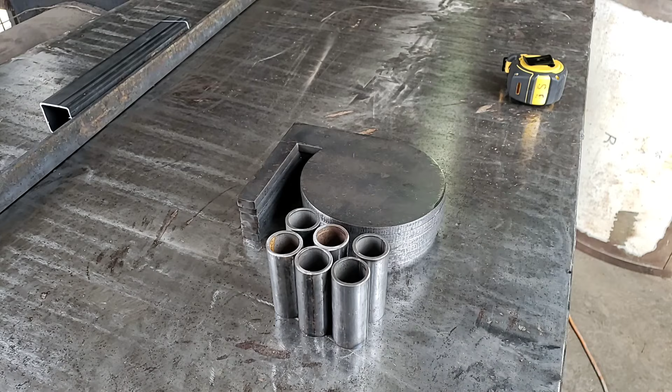We are in my shop and I've been wanting to build one of these dueling trees for quite a while, so I ordered this kit off of Amazon. I think this came from Magnum Targets, who I bought it from—no affiliation with them. In fact, most of my steel, probably all of it, is from Shooting Targets 7, but they don't sell a dueling tree kit, so I went on Amazon and found this one. This is 3/8 inch AR500 steel, 6-inch paddles, and it came with these little tubes that get welded to your own steel so you can build a dueling tree.

It comes with 6 paddles. I think these are Magnum rated. Primarily I'll be shooting this with 9mm, so it's probably a little overkill, but you never know—you might want to shoot something with a rifle from time to time at distance.

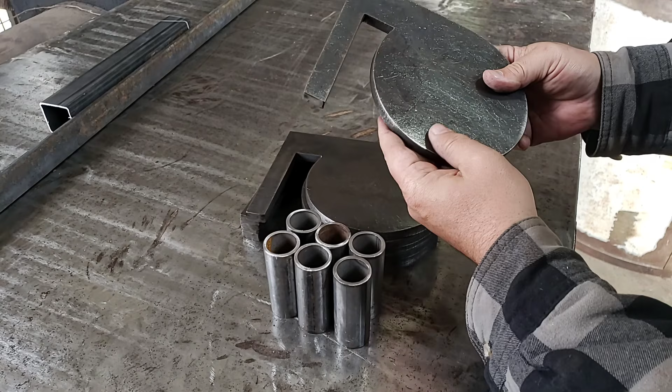So this is the kit that I got. These were pretty nice—I don't know if this is laser cut or water jet. I'd hope these were water jetted so it doesn't lose any tempering, but I just don't know. The kit was pretty inexpensive.

They did a nice job of grinding out these little paddles here, so I think they'll roll just fine inside the tubes since they're ground down nicely. Overall, you can't hardly mess up something that's water jetted or plasma cut, however it's done, but they're pretty nice. Looks like there's some attention to detail—it's all deburred, nice little paddles.

So this is what came in the kit: those 6 paddles, 6 of the little tubes. You got to supply your own steel. I've got a piece of 1.5 inch angle, 1/4 inch thick, in a 72-inch length. What I'm going to do is use this piece of steel to slide that into—maybe I can show you here.

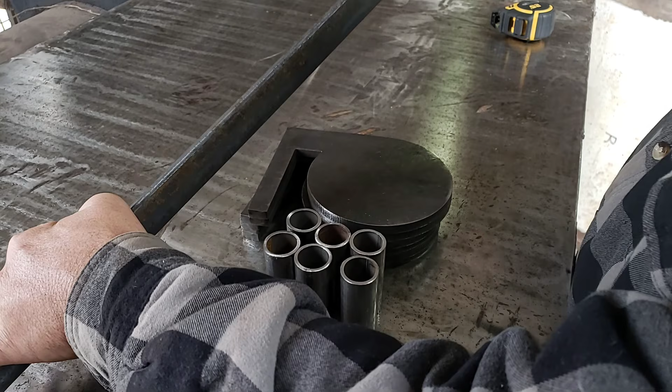What will happen is at the base, this will just slide into the base like so, and that's what's going to hold it up.

So that's the plan for today. We got to get a base put together, we got to weld this up. I'm also thinking about a way I can design this where it can be used for both a dueling tree and a plate rack. I don't know, maybe I'll sit down and draw some stuff out and see what we're planning to do here. Give me 1 second, I'll show you what the base looks like.

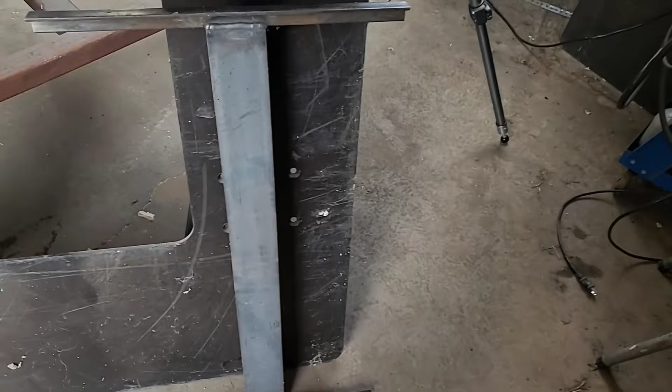Okay guys, so as far as the base, I got a couple options here. I've got this piece of steel that was in my scrap bin. We could use that, and that would probably be strong enough. I would just need to grind those little tabs off that are on there—I don't know what this was used for before—and lengthen these little arms just a bit, paint it up.

And I think that would work well. The deal would just come out something like this, and then I would stick that in there. So that's one option.

The other option I have is this big base here. This is 1/4 inch plate, all powder coated. I've got a bunch of these, I don't even know where I got them. They were kind of scrap—I bought them from scrap from somewhere. But anyway, this could work too.

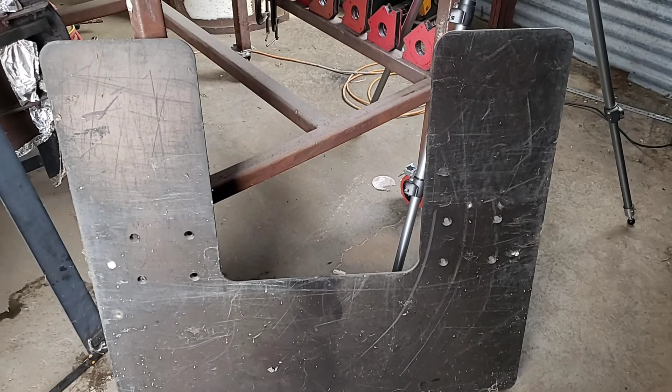And one thought here is I could put 2 of these on here, and then I could have 2 dueling trees side by side, or maybe use that to do a rack—a plate rack. So that's kind of what I'm thinking. Let's draw something out and see what we want to do.

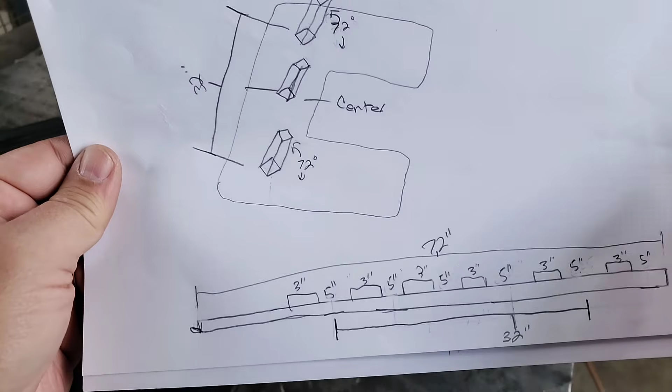So what I've decided to do here is, if you look, this is the base plate I'm thinking about using, the big one. I figured I can turn this into a deal where I can lay this dueling tree bar on its side and have a plate rack.

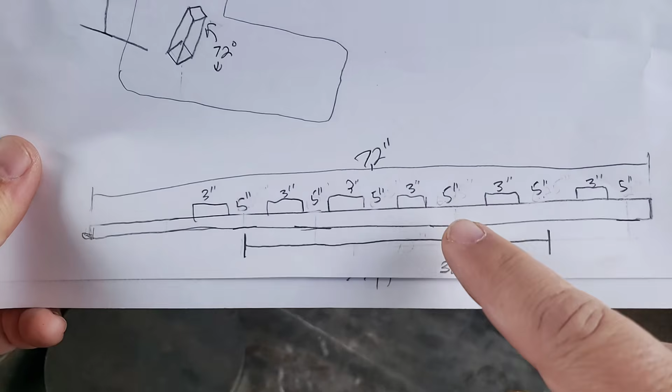So I've measured everything out. What I figured is if I have 5 inches between the 2 tubes on the plate rack, on the dueling tree, I have enough room to get the paddles in and out so I can maintain them or replace them with smaller gauge paddles for 22s and whatnot. So I'll start from the top, do 5 inches in, land that 3-inch tube, then 5 inches, then 3 inches in—8 inches total.

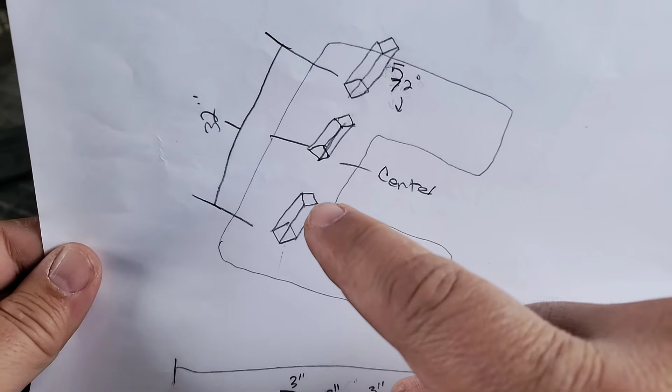That'll give 2 inches between each paddle. I think what I'm going to do today is just focus on turning this into a dueling tree. I don't have enough steel today to add the arms to make the plate rack, so I'm just going to take this base and drop one piece of square tubing right in the center.

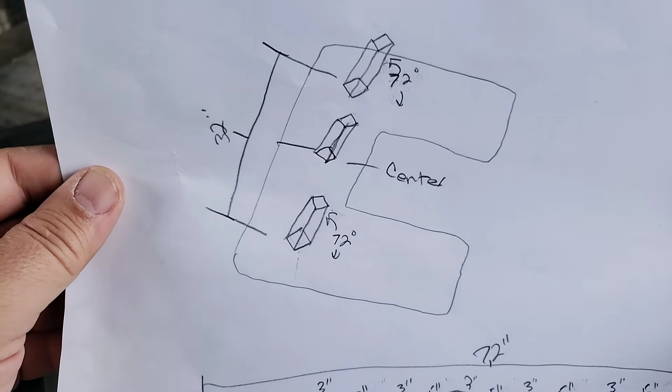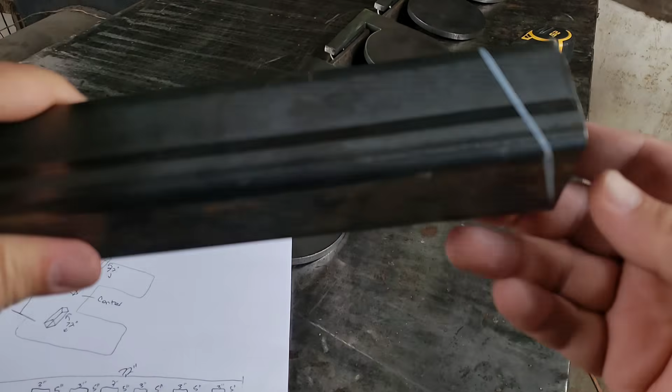We'll weld all this up today and we'll have our dueling tree. I'll do another video if the plate rack situation works out. I also read online that these dueling trees need to be angled about 18 degrees off of 90, so 72 degrees is what we need here. I've already marked this out, and you can see the 18 degree angle I'm putting in there so it'll lean forward a little bit.

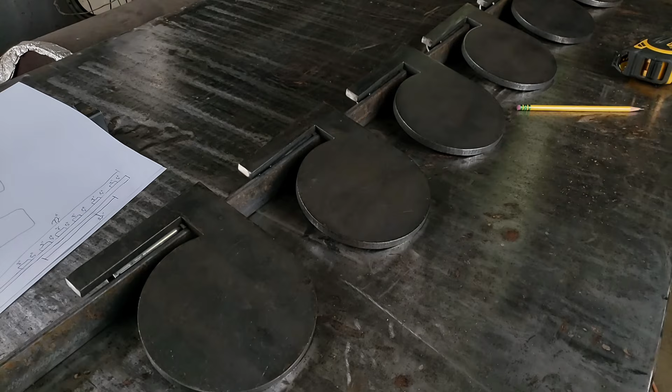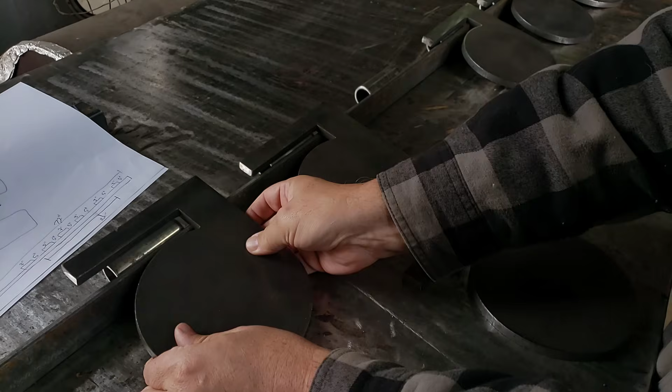So that's the plan, let me show you how it's laid out. There's 5 inches here and here, just enough room to slide this in. It'll be laid out similar to this, with a 2-inch gap between each paddle, all the way up to the top.

I'll go ahead and get all this cleaned up. We'll tack it up and see how it looks on the base. I'll be right back once I get everything cleaned up.

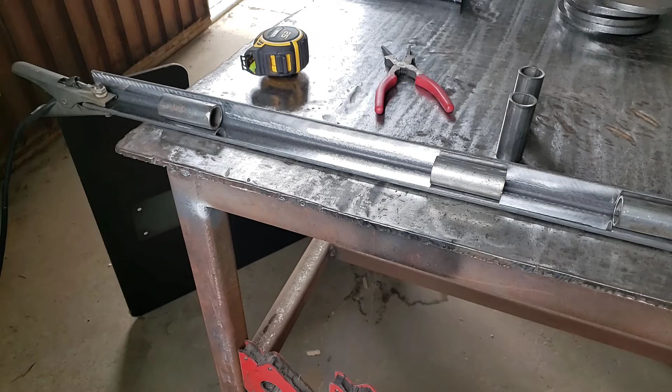So guys, we're starting from the top side here, working our first one in. I've already taken all the mill scale off and cleaned these up. We'll just tack this up here at 5 inches, see how we do.

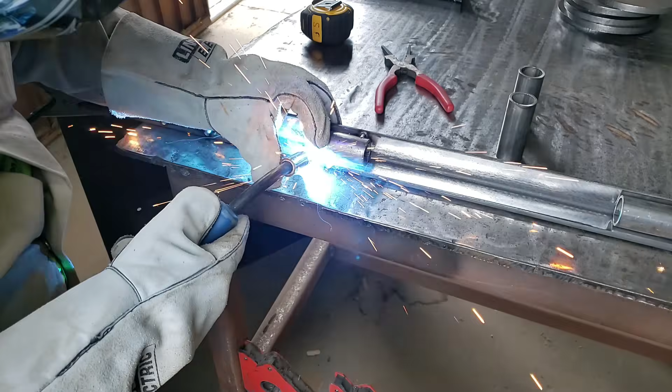While we're here, let's go ahead and test the paddle out, make sure we can get it in there. Yep, no problem, those will slide in and out super easy. So I'll just keep working my way down.

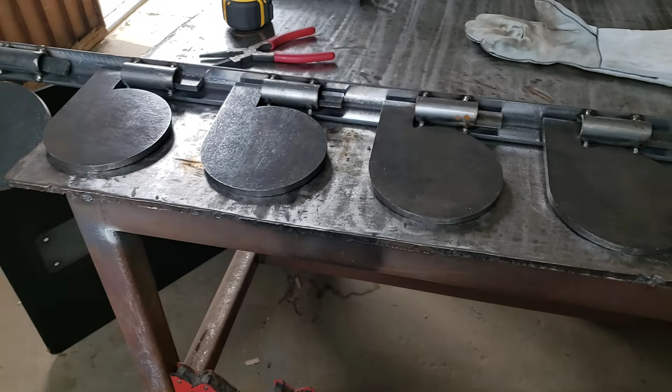Okay, we're all tacked up here. Let's get a look at this and see if we're in good shape. Just start putting these in. Okay, there we go, this is all tacked up. Paddles are in. Let's move over to the base and get that set up.

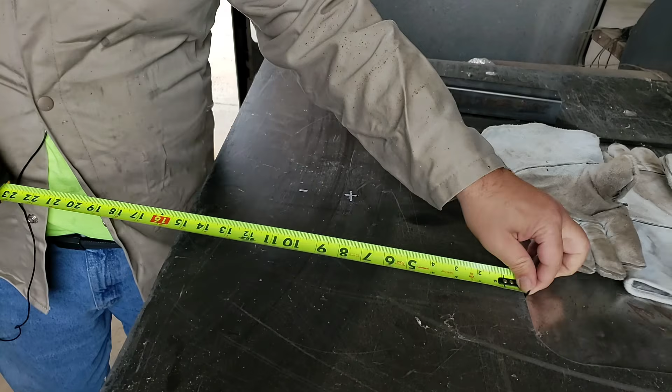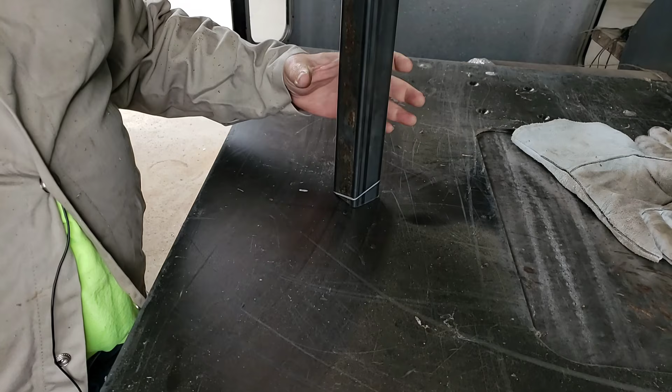Okay, so here's our plate. It is 40 inches wide and 15 inches tall from the little cutout here. So we need to come in 20 inches and 7.5 inches, and I've already marked a little X here where the upright tube's going to go. This will be angled 15 degrees off of 90. Let me go ahead and get this cleaned up so we can weld to it.

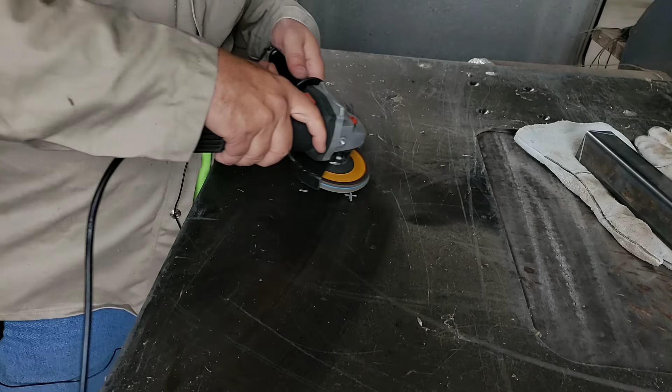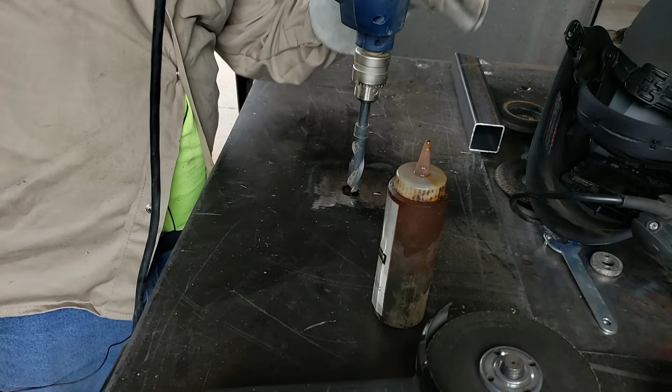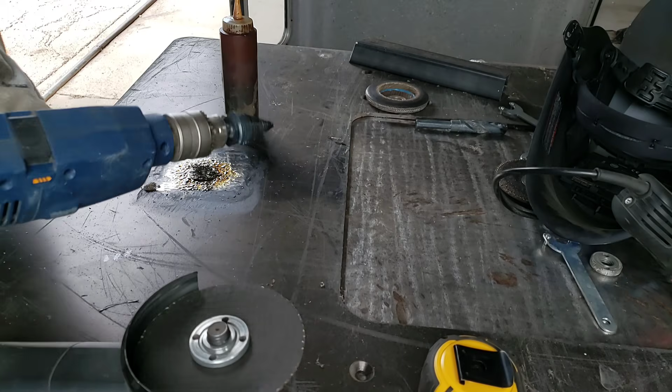Okay, I got a 3/4 inch bit here, and we'll just see if we can drill through that. I'll put some cutting fluid on here. Okay guys, I'm going to switch over to a Unibit, the other bit was just too slow. Put a little oil in there.

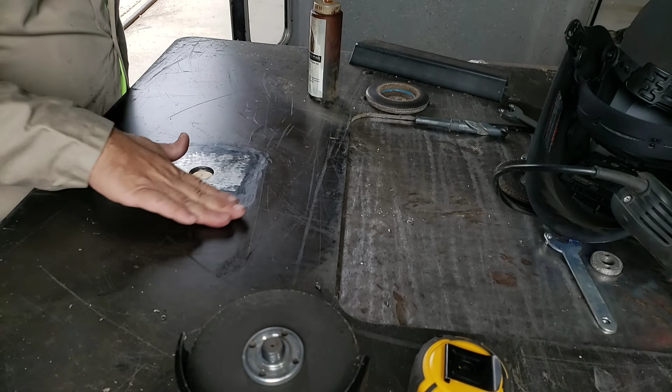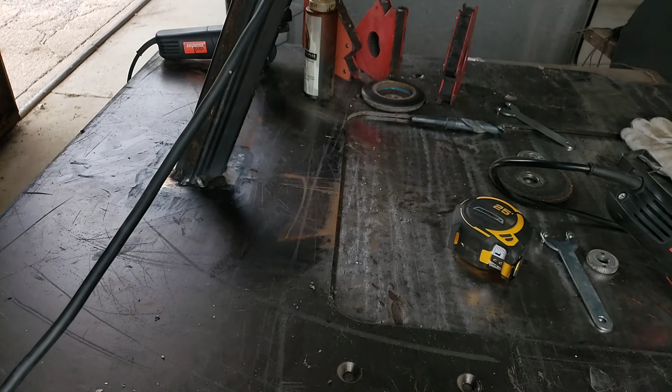Okay, now we've got a good drain hole here. I think what we'll do next is just tack this up here and see how we end up. All right guys, sorry, I needed another hand to tack this up. I'm going to go ahead and finish welding all this, and we'll be right back.

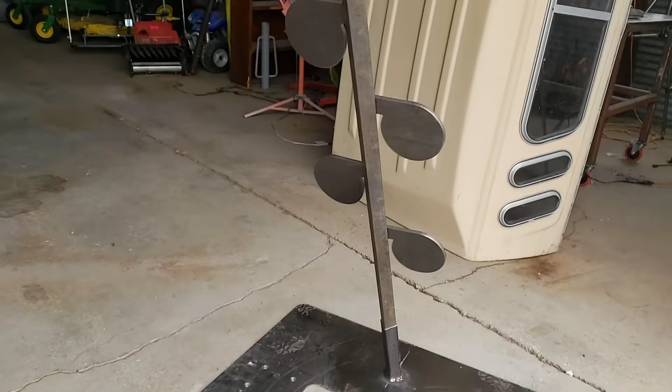All right, so this is what we've got here. You can see the base and the paddles. It's a little tall, so I'll just cut some off the bottom. You can see the angle here. Just looking at this, they flip pretty easy.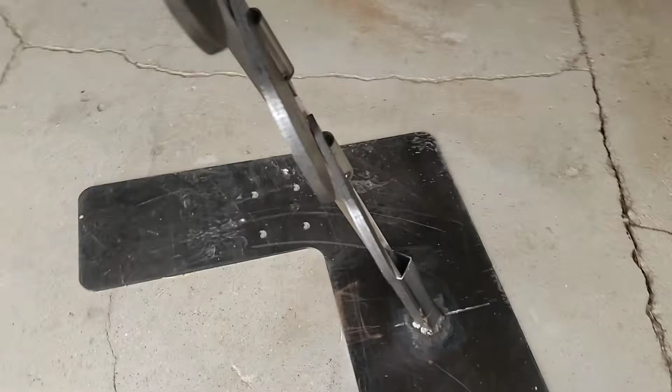You can see if they're all to one side, got about 2 inches of spacing on them. I think that's going to work pretty good. The way I designed this with the square tubing at the bottom, we can remove this.

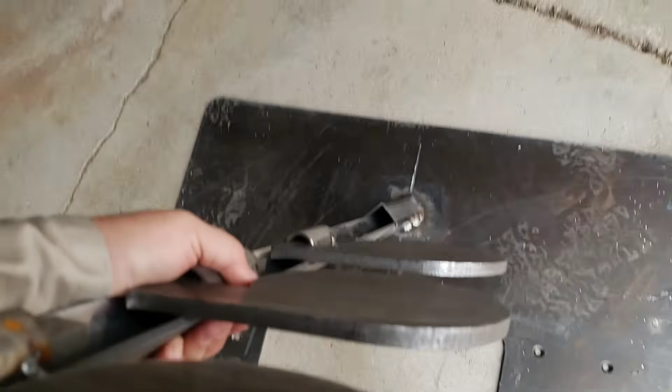And it's heavy, holy smokes. See there, that can come out. It's a two-hand operation, but anyway, that can come out. So I think that's what we'll go with.

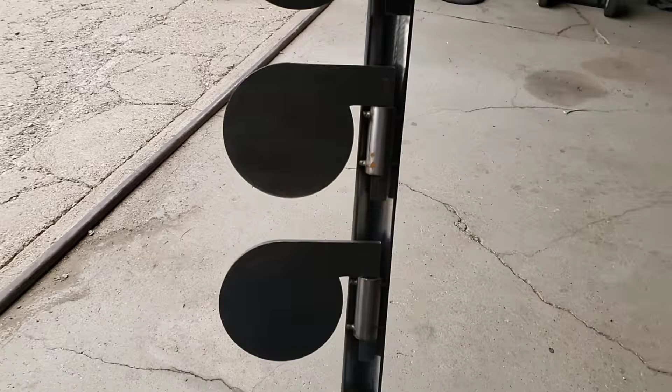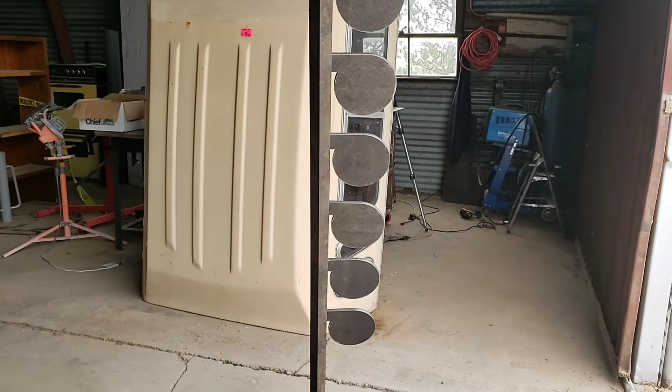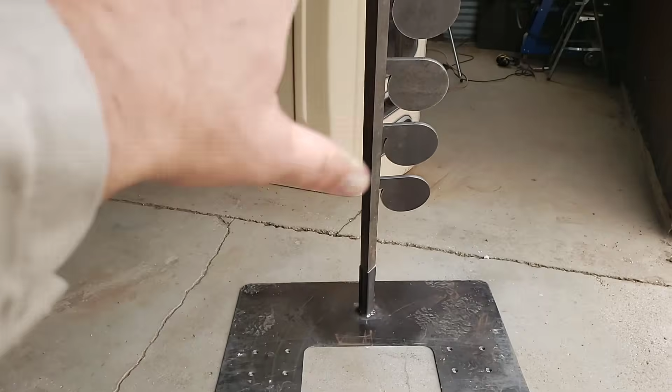This is just all tacked up. I need to finish weld all the welds here on the back and paint it. But the idea is maybe we can roll this over on its side and also use it as a plate rack. I'll put another square tubing here, another square tubing here, and then there'll be 2 pieces of angle iron coming up, and then I can rotate it on its side. That's for another video. But let me finish up all the welding here, and then we'll paint it, and I'll get it out there, and we'll take a look, see how it does.

Okay, we're here at the range. We've got our new dueling tree here. It's all painted up, 6-inch plates. This thing's sitting about 5 foot tall. So we're getting ready to put some rounds down range and see how it performs.